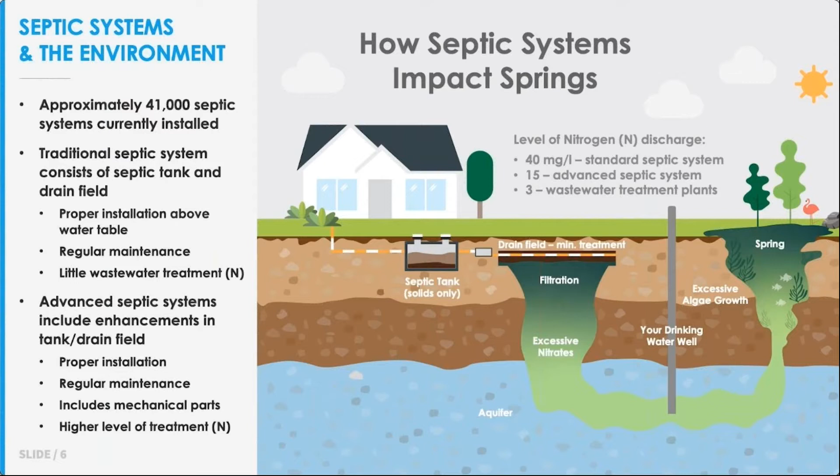Remember, not only is this nitrogen fueling algal blooms in our springs, as shown in this graphic, but it's also affecting the quality of our drinking water, whether that comes from a well in your yard or from a potable water drinking system. FDEP has studied both the Crystal River Kings Bay Springs and the Chassahowitzka Homosassa Springs to determine what is causing the algal blooms and the overall deterioration of groundwater quality in the springs.

After completing the TMDL study, FDEP completed a second study called the Basin Management Action Plan, or BMAP. The BMAP identifies the actions that must be taken to reduce the amount of nitrogen entering the groundwater and thus the springs. The development of a BMAP for each outstanding Florida spring in the state was required by the state legislature. The final BMAPs have been accepted by FDEP and have been signed into law. Entities like Citrus County are now required to work to achieve the requirements set out in the BMAP.

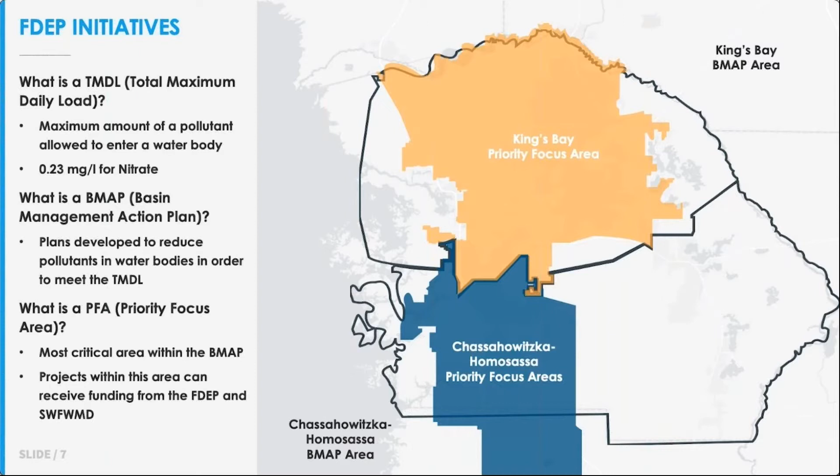Within each BMAP planning area, shown by the dark black line in the figure, there is a smaller area that is of the most concern to the FDEP because it has been shown to have the most immediate impact on the springs. These areas are called the Priority Focus Areas, or PFAs, and are shown as the colored areas on this figure.

Citrus County has implemented fertilizer ordinances that are meant to reduce the impacts to the springs from sports turf grass and urban turf grass fertilizers. The Florida Department of Agriculture and Consumer Services, also known as FDACS, has implemented best management practices to reduce the quantity of nitrogen coming from farm fertilizer and livestock waste.

Citrus County is also working to upgrade all of its wastewater treatment facilities to meet the BMAP requirements and has started this study, the Wastewater Treatment Feasibility Analysis, to set in motion a plan to reduce the impacts from septic systems. The FDEP provided a grant to Citrus County to develop a plan to reduce the amount of nitrogen to the springs from septic systems. This plan is called the Wastewater Treatment Feasibility Analysis.

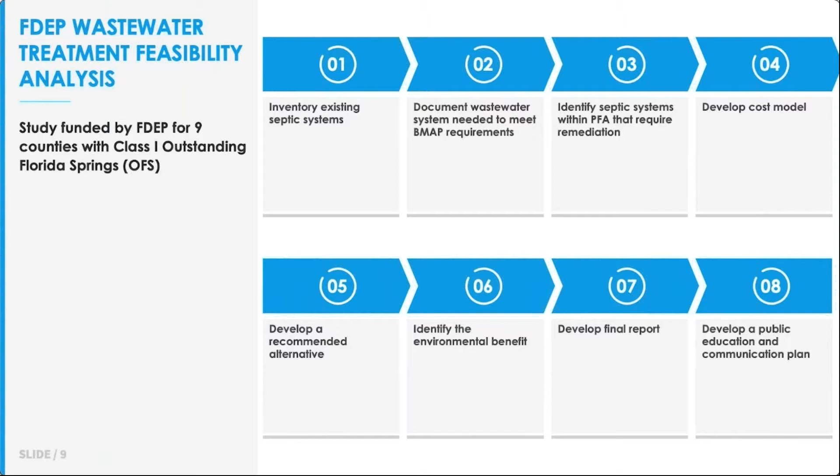The plan had specific requirements that included inventorying existing septic systems, documenting wastewater system needs to meet the BMAP requirements, identifying septic systems within the PFA that required remediation, developing a cost model for the plan, developing a recommended alternative, identifying the resultant environmental benefit, developing a final report, and developing a public education and communication plan that will help the residents understand the issues and processes for addressing the issues.

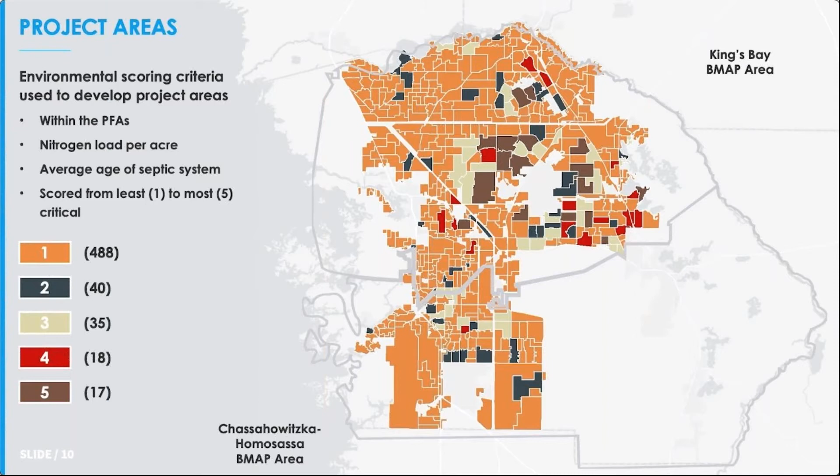As you can see on this map, areas ranked as 4 and 5 are prevalent on both the east side of the county, which is furthest away from the springs, and the west side of the county, which is closest to the springs. The takeaway message here is that we are all negatively impacting the quality of the groundwater and the springs.

After the environmental scoring was completed for each project area, a phasing plan had to be developed in accordance with the BMAP requirements. The phasing plan took into account the environmental scores as well as other constraints, such as the proximity of the project area to an existing sewer system.

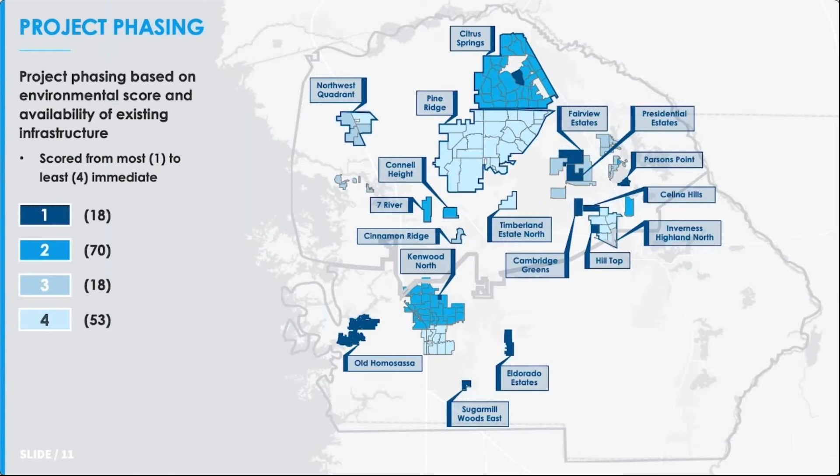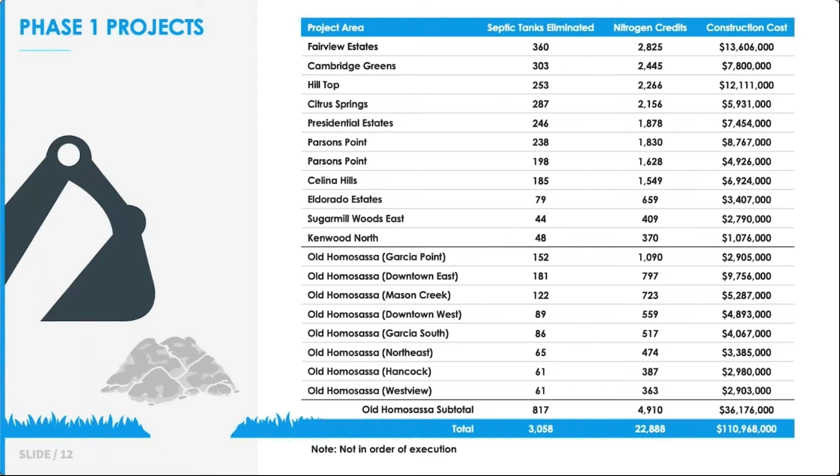Several of these projects are currently in design, including projects for the Cambridge Greens subdivision and multiple projects in Old Homosassa. The county does not have a set timetable for the implementation of the phase 1 projects, and the overall timing will be heavily predicated upon the availability of funding from the FDEP and the Southwest Florida Water Management District.

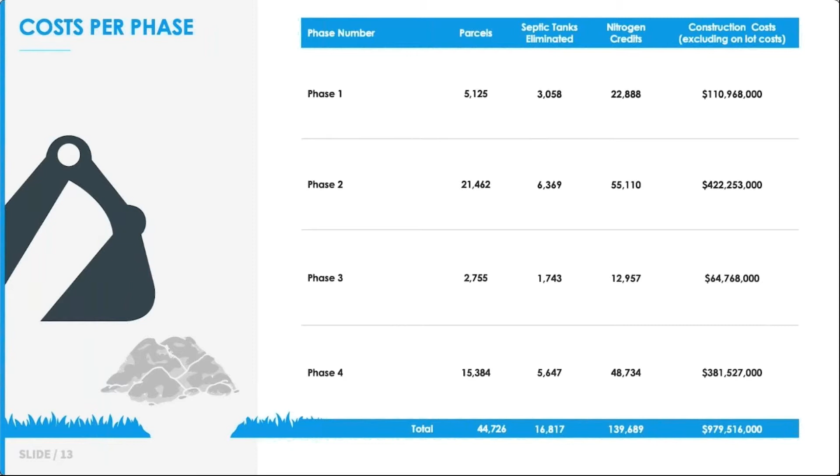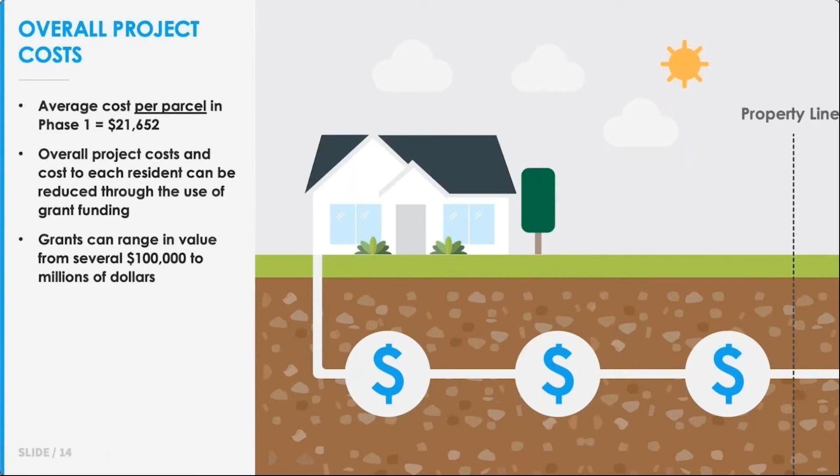It is obviously very important to understand how this will impact property owners. Based on our planning level costs, the average cost per parcel in phase 1 is $21,652. However, it is important to recognize that it is currently the county's plan to only implement projects for which they receive grant funding in order to offset the overall project costs. When grant funding is received, it reduces the overall project cost and the cost for each property owner. Grants can range from several $100,000 to millions of dollars.

There are several agencies that provide grant funding assistance for septic to sewer projects. These include the Florida Department of Environmental Protection, the Southwest Florida Water Management District, the state legislature, and the Florida Department of Economic Opportunity. Each of these grant programs have different project requirements, provide different levels of funding, and have different project requirements in order to be selected for funding.

Additionally, all of these funding sources have limited funding each fiscal year, and the grant selection process is competitive. Thus, grant money is not always guaranteed. However, the county staff is very familiar with these programs and has already secured well over $10 million in funding for similar projects over the last 5 years.

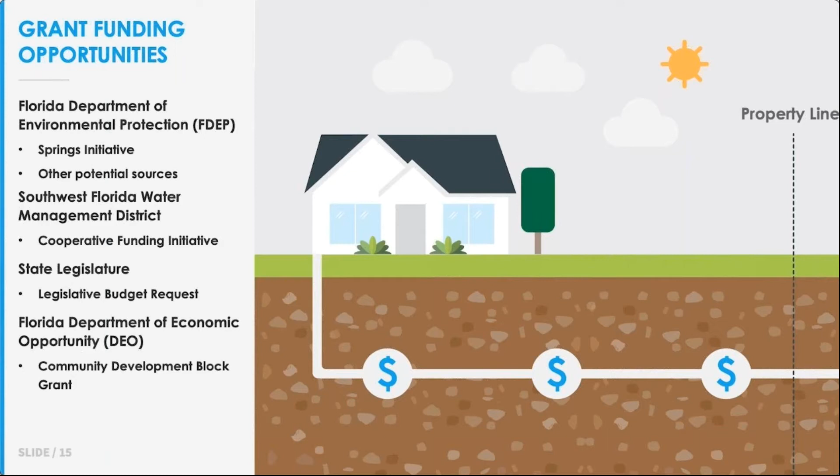So how much will property owners ultimately be charged for connection to the sewer in accordance with the state mandated BMAP plan? We have provided this example. However, it is important to recognize that this is only an example and that the actual cost will be based on the actual construction costs and grants received. The net construction cost is equal to the total construction bid prices received during a competitive bid minus the actual grant funding received from the funding agencies. The homeowner charge is equal to the net construction cost divided by the number of parcels that the project will serve, plus the connection fee.

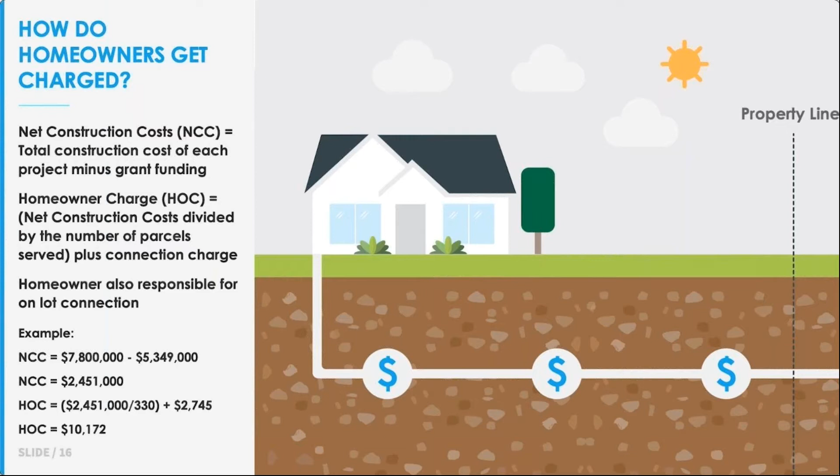$10,172. Please keep in mind that the homeowner is still responsible for their on-lot costs of abandoning their septic tank and connecting to the sewer system. The county understands that this is a huge burden for each property owner and is doing everything that it can to reduce the project costs while meeting the state-mandated BMAP requirements. There are currently two methods available to homeowners to pay their septic to sewer conversion charge. First, the homeowner could make a one-time lump sum payment for the connection fee. We realize that some homeowners may not wish or be able to make a lump sum payment.

Thus, the county has also set up a program where the homeowner charge can be added to your tax bill over a 10-year period. The homeowner charge in this case will be divided by 10 and added to the tax bill each year for the next 10 years. This method of payment will also include a 6% interest rate on the homeowner charge.

It should be noted that two of the advantages of performing a septic to sewer conversion on your property is that it will increase the value of your home, and that by eliminating the septic tank and drain field, you will have more usable property area, especially for those homes that rely on a mounded drain field.

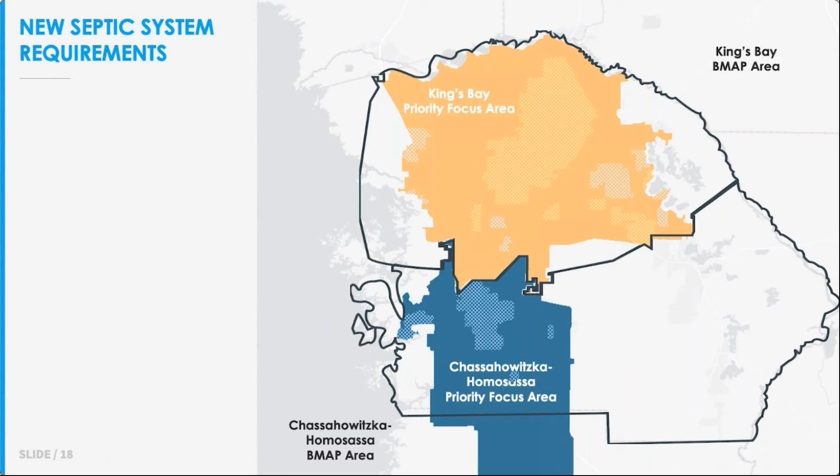We have focused much of our discussion today on septic to sewer conversions. However, as shown in the earlier slides, there are large portions of the county that fall within the PFA where septic to sewer conversions are not planned. The map on this slide shows the BMAP outlines in black and the PFA areas in the shaded colors. Within the shaded PFA areas, you will note that we have cross-hatched areas which represent the septic to sewer conversion areas that we discussed earlier in this presentation.

The rest of the PFA areas that are not part of the septic to sewer conversions and are shown in the orange or blue color are also faced with BMAP requirements when it comes to their septic systems. As required by the BMAP, if a property owner is going to install a new septic system on a lot that is 1 acre or less in size, they must install an advanced septic system. A traditional septic system is no longer allowed.

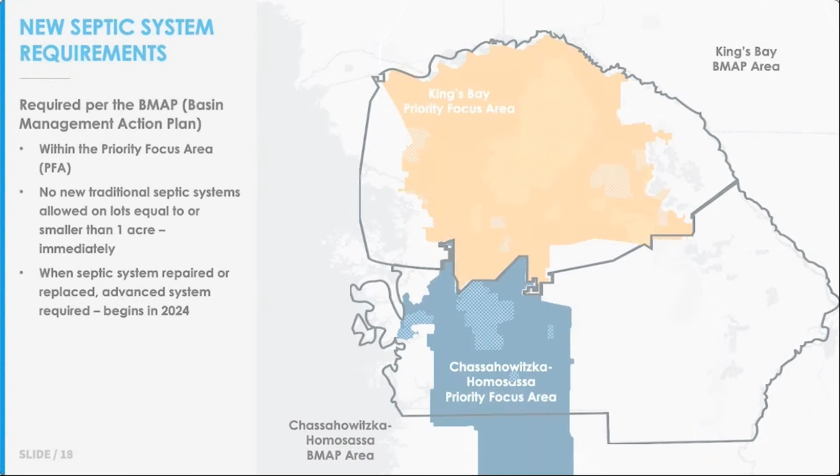Additionally, within 5 years of the BMAP adoption, which is the year 2024, if a traditional septic system on a property of any size within the PFA requires repair or replacement, that septic system will be required to upgrade to an advanced septic system. There are 3 types of advanced septic systems that homeowners may consider.

First is the in-ground nitrogen-reducing biofilters. This system is most like a traditional septic system, except that under the drain field, there is material, wood chips, that allows the nitrogen in the wastewater to be reduced. Within this system, you will be required to pump out your septic system every 3 to 5 years and replace the media in the drain field every 10 years, unless it can be proven to still be effective.

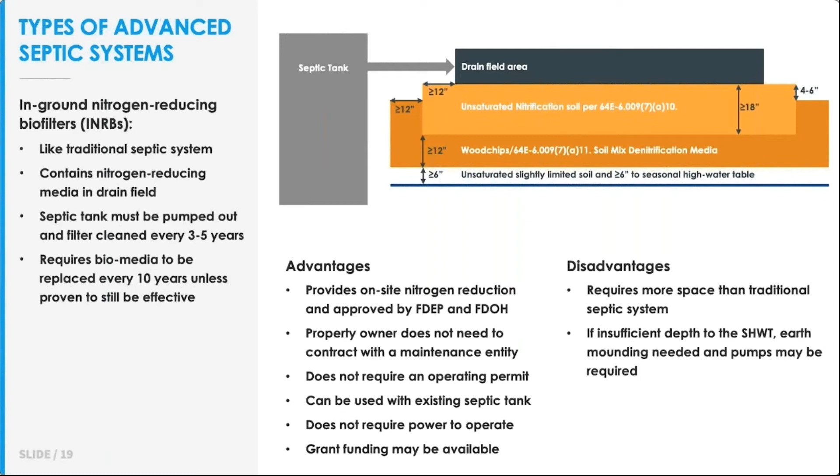The advantages of this system include providing for on-site nitrogen reduction, can be used with existing septic tank, and grant funding may be available. The disadvantages of this system include it requires more space than a traditional septic system, and if insufficient depth to the seasonal high water table exists, then earth mounding is needed and pumps may be required.

The second type of advanced septic systems are aerobic treatment units, or ATUs. These systems are traditionally multi-tank or multi-chamber systems that include an aeration system to enhance nitrification. These systems must meet NSF 245, which is a national standard, and must be on the Florida Department of Health's approved ATU list. It is important to recognize that you will be required to enter into a maintenance contract when you have this type of system installed.

The advantages of this system include providing for on-site nitrogen reduction. It requires less space than the in-ground nitrogen reducing biofilter, and grant funding may be available for homeowners. The disadvantages of this system include you must contract with a maintenance entity, and if insufficient depth to the seasonal high water table exists, then earth mounding is needed and pumps may be required.

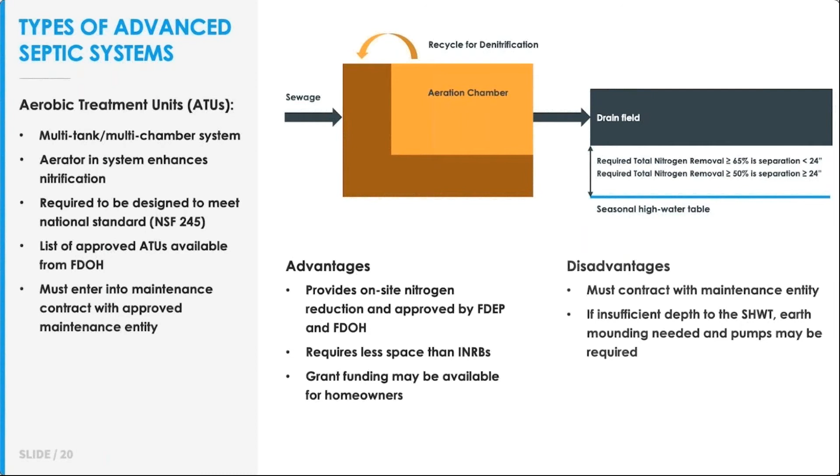The third type of advanced septic system is the performance-based treatment system. These are the most complicated of the systems and will mostly be used on very space-limited sites or sites with high wastewater loads. Performance-based treatment systems are multi-tank, multi-chamber systems that provide the highest level of treatment. However, they must be designed by a licensed professional engineer, and you must enter into a maintenance contract with an approved maintenance entity for use of these systems.

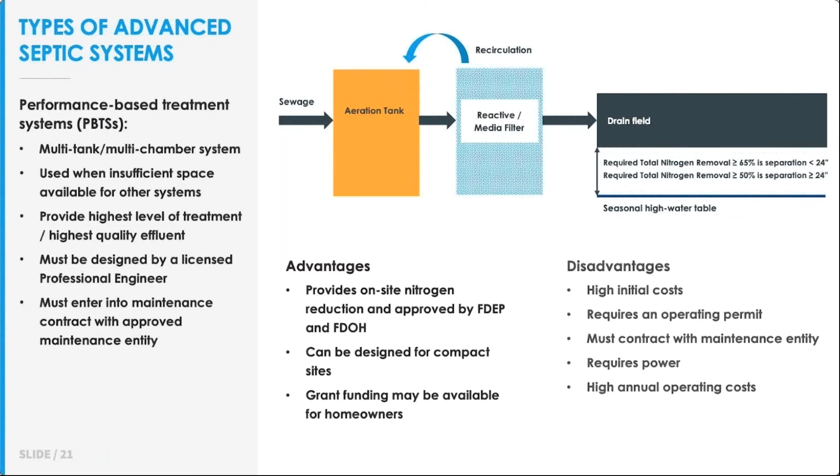The advantages of this system include providing for on-site nitrogen reduction. It can be designed for compact sites, and grant funding may be available for homeowners. The disadvantages of this system include a high initial cost. These systems require an operating permit. You must contract with a maintenance entity. They require power. They have a high annual operating cost.

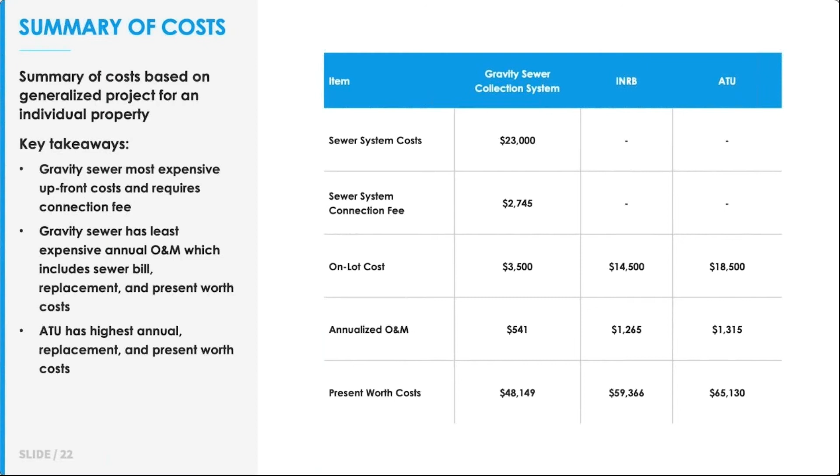Implementation of projects identified in the wastewater treatment feasibility analysis are required by state law in order for the county to meet the requirements of the BMAP and will have long-lasting positive impacts to each property owner in Citrus County. The benefits of this program include the following: improved health of our groundwater, which is the source of your drinking water; improved health in our springs, which draw in 500,000 visitors each year and resulted in $270 million in revenue in 2019; increased property value as a result of these improvements; and for those lots where septic to sewer conversions will be performed, it provides the property owner with more usable property. With that, we will conclude this second public presentation on the wastewater treatment feasibility analysis.

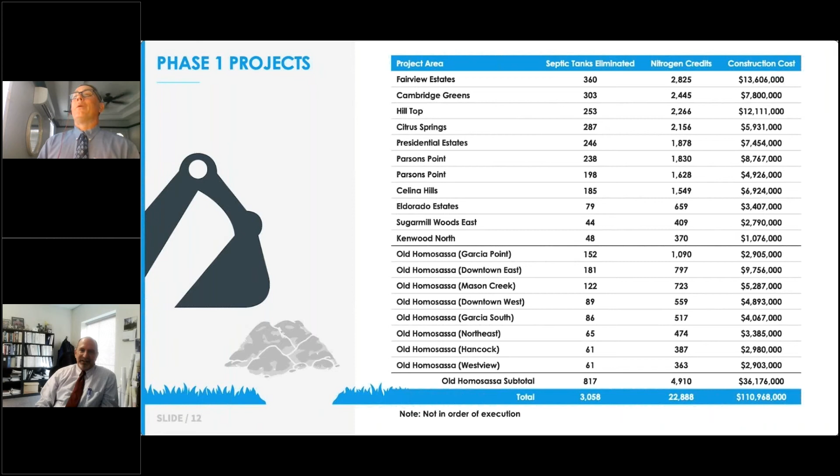So Ken, I don't know if you have a map built into your head up there, but what I would say is that obviously, Brian and Christina, if you want to reach out to us, we have the hotline there. Knowing that you're out here in the forest, I'm trying to get my bearings, but somewhere out in this area is where I'm imagining that you guys are at. But we can help you look it up on a map and try to give you a better idea on how you're going to be impacted by this.

Absolutely. So I would say that there is both the phone number as well as the email address to get some more specific information. If you would submit a question through that means, we can help you find that specific residence and talk to you specifically about how you're impacted by this. Ken, do you have anything else to add on that?

Okay, that sounds good. And I see I have a couple. I'll jump down. They had submitted a couple of other questions. The last one says yes, west side. So they're on the west side there. So yeah, Brian and Christina, I would say if you could reach back out to us, go to the website. That's Citrus County Wastewater TFA.com. Go there, submit a question via the email. There's an info email there that you can submit, and we can get you the information that you need that way.